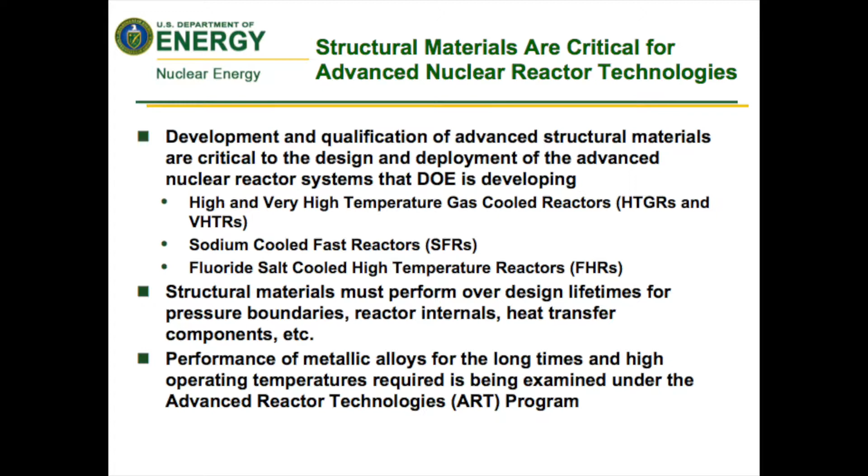All right, the work that we're doing under ART certainly supports the overall objectives of the Nuclear Energy Roadmap. The specific objective is to develop advanced fast reactor technologies for deployment in the 2050 timeframe, and the specific pieces of that we're addressing are to develop the improvements of affordability of this class of reactors, as well as to develop sustainable nuclear fuel cycles.

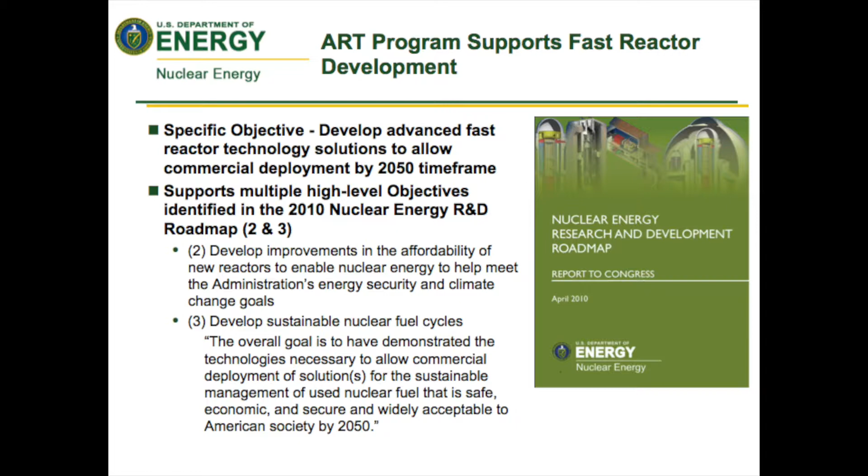In particular, today I'd like to talk about some of the work we're doing on advanced materials R&D, specifically the development qualification of materials for advanced fast reactor systems, and this would include both the classes of ferritic martensitic steels as well as austenitic steels.

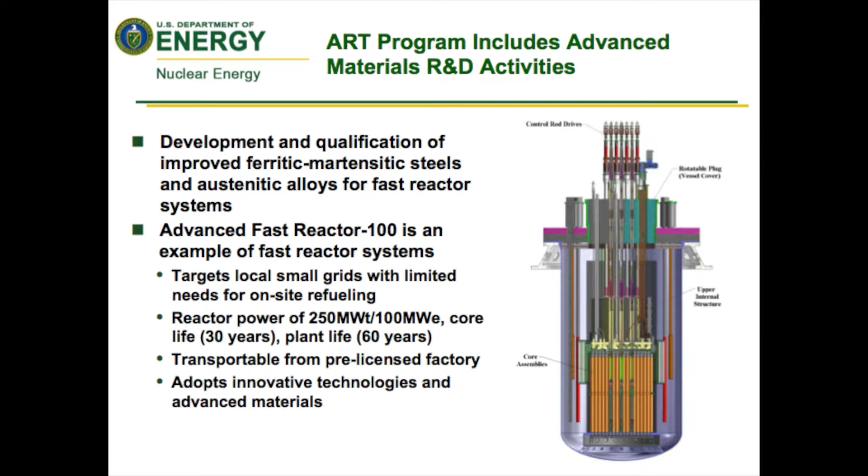A typical reactor that we might be looking at would be the Advanced Fast Reactor 100. This is a small modular reactor size system, typical of the type you might put on a small grid with limited needs for on-site refueling, on the order of 250 megawatt thermal, with a core life of 30 years and a plant life of 60 years, so you'd only be doing one refueling. Factory built, transportable from the factory to the site, and it's going to involve innovative technologies and advanced materials for things like affordability, safety, etc.

Now, we have been involved at DOE in the development of advanced alloys for several years now, and in particular, the rest of the talk, I will be talking about some of the austenitic alloys that we have been looking at. Starting in about 2008, we looked at a range of materials, the goal being to provide structural materials for advanced reactors, specifically fast reactors, but they could be used with other types of advanced reactors, which have better high temperature strength to enable higher thermal efficiencies and provide improved design and safety margins.

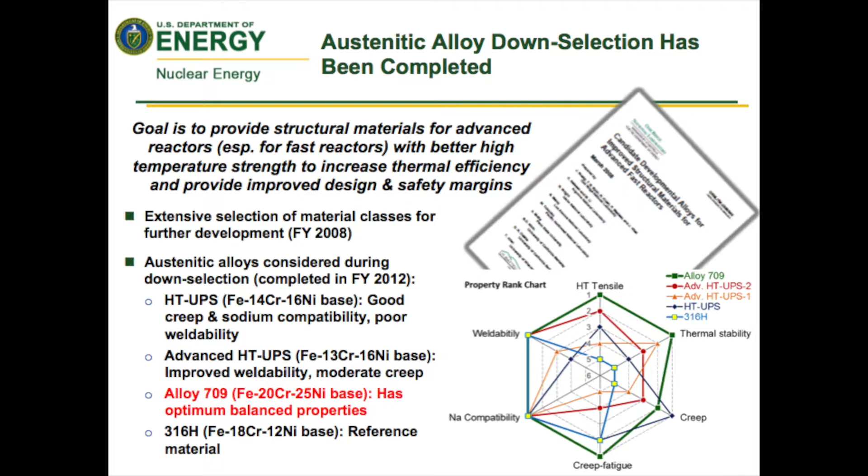So what we've ended up doing, come on, hello chart, there we go. We ended up doing a down select of this material about 2 years ago from the other candidates because it showed on the whole the full palette of improved properties, but specifically it showed a substantial improvement in strength. Now, alloy 709, a nitrogen stabilized, niobium strengthened austenitic alloy, has about twice the creep strength of 316 stainless. So if and when we're able to get this in the code, it will provide designers a dramatically enhanced material that they can use, again, increasing their design envelope and their safety margins for the reactors that they can build with this stuff.

709 is based on the 20 chrome 25 nickel composition. It was originally developed for power boiler applications. Has excellent oxidation resistance at the kind of temperatures that we are looking for.

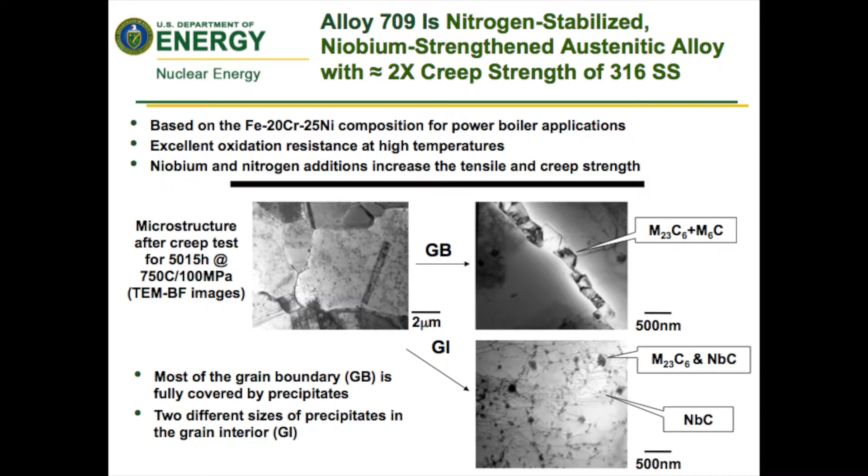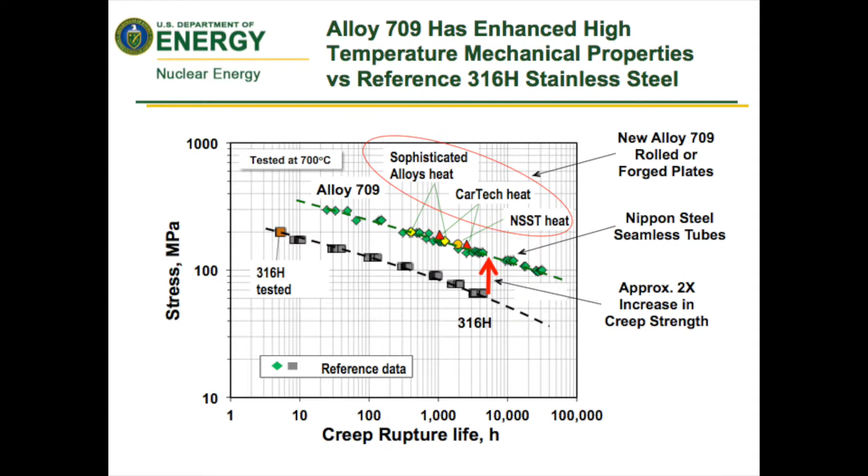So we're focusing on this as one of 2 materials. We also have a ferritic martensitic material, but that doesn't enter into the NEUP, so I'm not going to go into that today. There are some things that are particularly important for this class of materials. Actually, any of these classes of high temperature materials, fatigue and creep fatigue, are very dominant fracture mechanisms, failure mechanisms that are going to be operative over the reactor component lifetime.

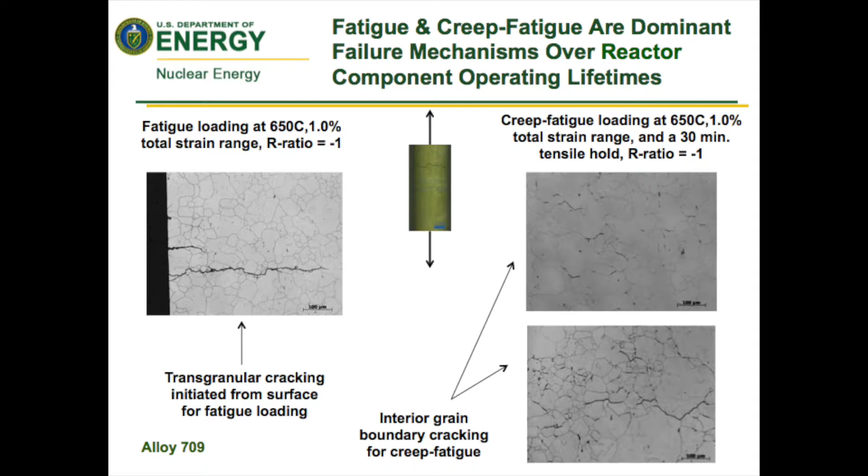So these are the types of behavioral components that we've got to look at, particularly the ones with hold times that take a long time to assess. You really can't do the laboratory testing over the extended lifetimes that the components are going to have, and this is what we're going to ask you guys to take a look at for us. So we have 2 different, fairly closely related, but certainly separate topics that we want you to look at.

The first one, under 3.1, is to look at the type of mechanisms that would be required to support the design of the fast reactors for 60-year life, specifically related to the establishment of ASME code design allowable stresses. And these are things that are based on stress to rupture out to 500,000 hours, as well as tertiary creep and stress to cause 1% strain out to 500,000 hours. But we can't test to 500,000 hours. You can't do that. Even graduate students don't live that long.

So we've got to go ahead and put this thing into test at the laboratory scale. Like all good metallurgists, we like to test at higher temperatures, for instance, say 700 C, even though we may be operating at 550 C. We're going to test at shorter times, but we have to understand what the mechanisms are for the creep and creep fatigue deformation, things like microstructural evolution, the type of damage, for instance, grain boundary cavitation and whatever, that goes on to be able to provide the guidance that we can do the extrapolation of the laboratory data out to the full lifetime, 500,000 hours, effectively the number of hours that exist for a 60-year reactor life, with confidence. And so that's what we're going to be asking you guys to do.

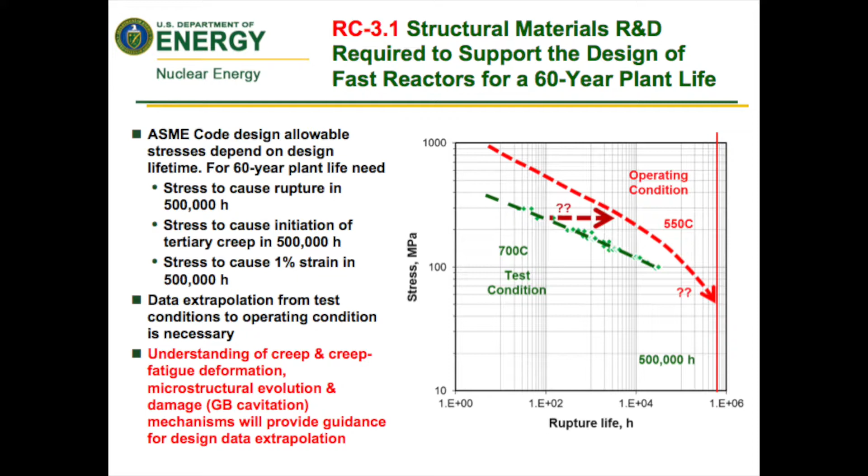The second topic, similar but different, also looks at how to extrapolate laboratory data out to 60-year lifetime, but this part of it looks at the flaw evaluation procedures and what is required to disposition the detected indications or flaws that turn up during in-service inspection. We also need to understand this relationship from laboratory to in-service conditions required to develop schedules for in-plant inspections. They're clearly going to be different than the LWR cousins that we are moving upward in temperature from.

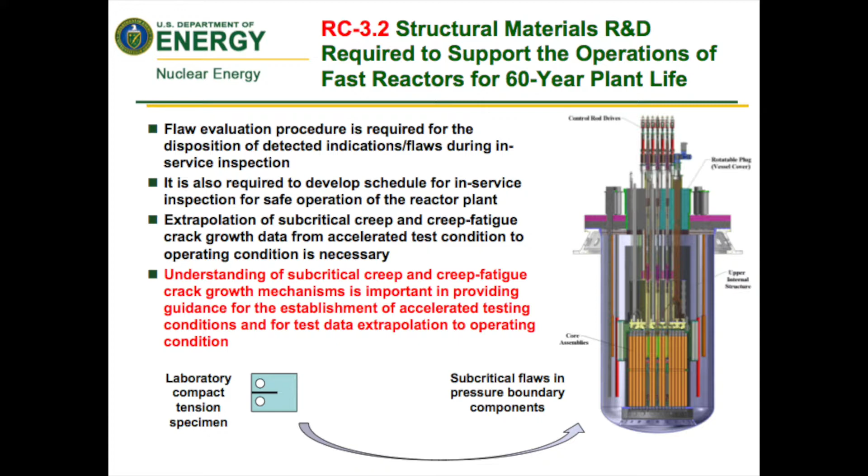And we need to be able to extrapolate the subcritical creep and creep fatigue crack growth data from the accelerated conditions that are produced in the laboratory to what is going to happen over the extended lifetimes of these actual reactors. So we need to be able to take what is developed, understanding the creep and creep fatigue crack growth mechanisms that we can get from the laboratory specimens such as compact tension, and translate that in time and geometry to the subcritical flaws that would exist in pressure boundary components over the reactor operating lifetime. So specifically what we're asking you guys to do is the following. We have 2 different but closely related code qualification activities that we want you guys to work on this year.

Creep and creep fatigue deformation and grain boundary cavitation mechanisms for alloy 709. And the outcome we are hoping to get from this is to provide a mechanistic-based, validated approach to extrapolate the creep and creep fatigue data from the accelerated test conditions that you can get in the laboratory to the long-term fast reactor operating conditions that are needed to support the extrapolation of the ASME code stress allowables out to 500,000 hours. So that's topic number one.

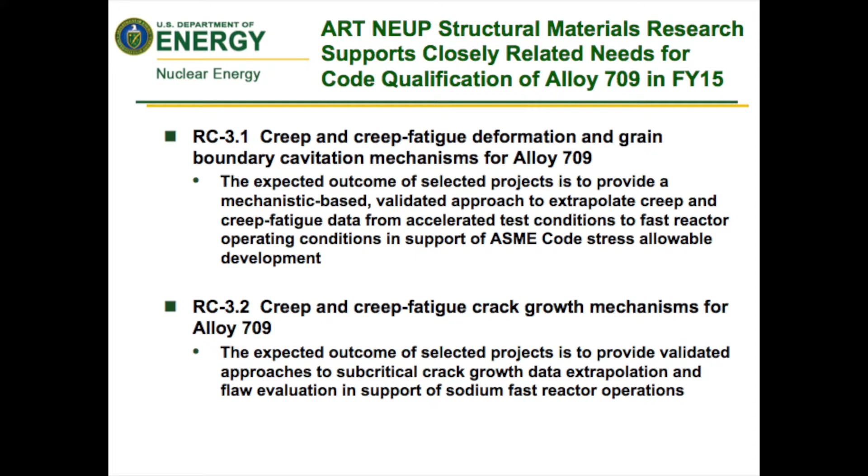Topic number two is to understand the fatigue and creep and creep fatigue crack growth mechanism, also for 709, that will provide validated approaches to extrapolate subcritical crack growth data from the laboratory out to the real components in reactors over their lifetimes.

So the proposals we're looking for, and we'll do these one at a time, under RC 3.1, creep and creep fatigue deformation grain boundary cavitation mechanism, we're looking for proposals to develop a fundamental understanding of the deformation mechanisms involved. These are things like dislocation or diffusion-controlled creep, microstructural evolution, damage mechanisms, grain boundary cavitation, for instance, of 709 at the elevated temperatures under creep and creep fatigue loading conditions to be able to allow us to intelligently apply and interpret the data from the laboratory and accelerated testing to the lifetimes that we need for the extrapolation.

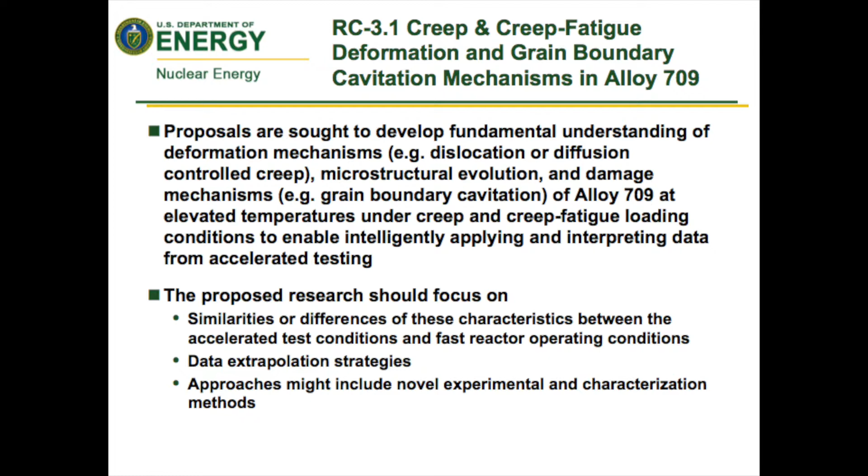The research should focus on both the similarities and differences of the characteristics between the accelerated test conditions and the actual operating conditions of the reactors. Come up with strategies for data extrapolation. And I might add, you get extra points if you can come up with approaches that include novel experimental and/or characterization methods.

The second category deals with creep and creep fatigue crack growth mechanisms for 709, and we're looking for proposals to develop, again, fundamental understandings of the mechanisms for subcritical crack growth in the same alloy at elevated temperatures under the same type of loading to enable us to apply and interpret the data from the laboratory tests to the field.

Proposed research should focus on, again, similarities and differences of creep and creep fatigue subcritical crack growth between the accelerated lab conditions and the fast reactor operating conditions, as well as between the as-received materials and the materials that have undergone aging in service. Extrapolation strategies for the crack growth data obtained from the fracture specimens in the lab need to be developed for application into the field. And once again, we're looking for approaches that might include novel experimental techniques and characterization methods, as well as validated flaw evaluation analysis techniques.

That's really all I had to say in prepared remarks, but I would be glad to talk with you all about this, as well as our technical point of contact. His name is Sam Sham, a very knowledgeable guy in this area and heavily involved with high temperature codification activities within ASME code. Sam's at the Oak Ridge National Laboratory. So if there are any questions on this, I think we're going to open up the floor for questions, and we'll be glad to answer those if you guys have some.